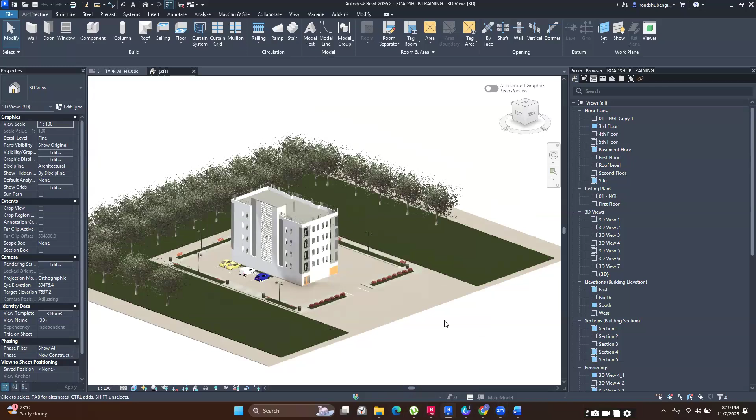By doing the analysis and design, we are looking at, one, the structure you're going to be using, and two, we need to understand the actions of the loads acting on our structure. From those actions, we want to understand the effects on the various elements - the internal forces that develop in the members, that is the columns and beams, the shear forces that arise from the loading, the bending moments, and how we transfer that load to the soil. So basically, that's what we are going to be doing.

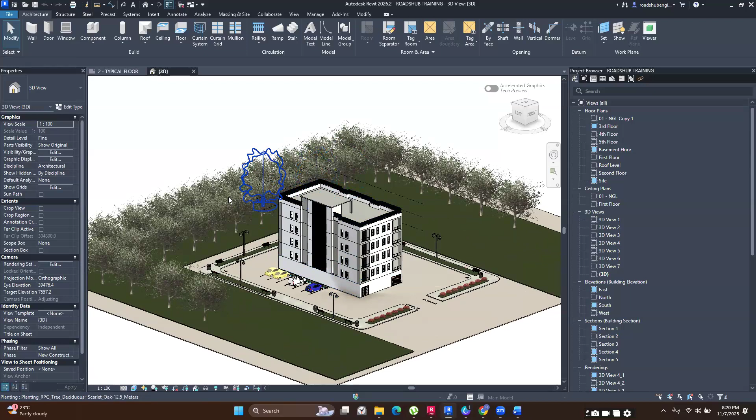Once we understand those actions and effects, we can go to the reinforcing bit, where we ensure our structure is safe to stand. For reference, we are going to be using a few books, mostly, and we are also going to be referring to the Eurocodes for our design.

So what you're looking at right now is the architectural model that you're going to be using. This is what you're going to be designing. The purpose of having this is to put you in a real life scenario that you would find yourself in.

My assumption here is that we are all engineers, and we know our role when it comes to construction. For a structure to stand, it takes a lot of teamwork - one from the client and architect meeting, so they can visualize the idea and come up with a concept they want to build. Once the architect and client have met and pictured something, that's where you, as the structural engineer, come in. At this point, they do not know what sizes of columns they need, or where the beams would be placed.

They do not know the required sizes of the slabs and reinforcements, or the types of foundation they would use. So that is your role to find out the sizes of the columns, the orientation, where the beams would be.

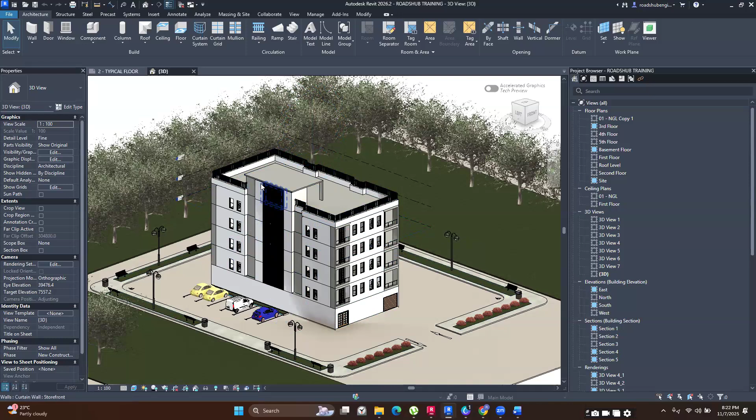And also the foundations, to ensure the structure is safe. So for you to do that, you need to do an analysis and then the design. But before the analysis, you need to understand what they want to achieve, and have a good grasp of the loads you're going to apply to your structure, because it plays a big part in the results you get.

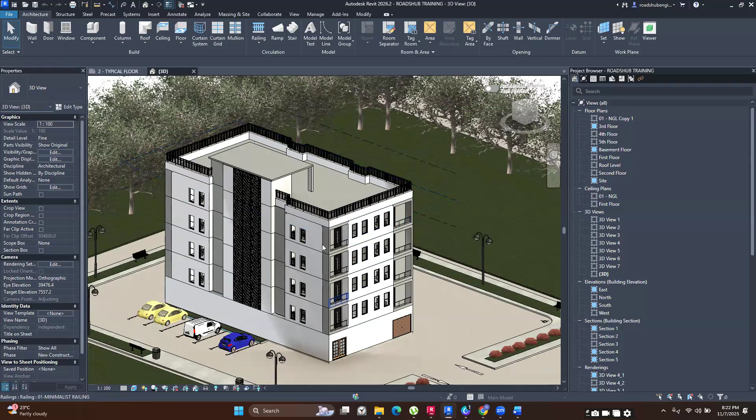This structure is what you're working with because it will give you good exposure to most of the RC elements you'll be required to design. So this is how it looks. It's a five-story structure, with 5 floors and a basement floor.

Let me open up a section view. So you can see it has a section, with a basement floor over here, which is below the ground. This floor is going to be used as a parking lot. We're going to need to design the foundations or basement walls to ensure they do not collapse due to the weight of the soil, the soil pressures, and the water acting on the site.

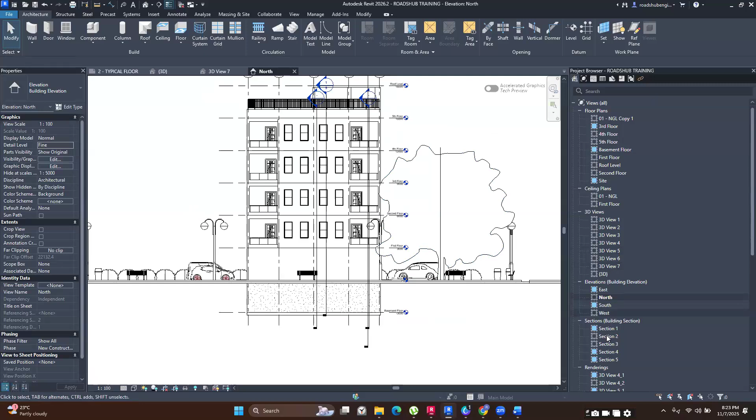And because we have a basement floor, it makes sense that we would have a ramp. So these are the RC elements we're going to be designing when we work with this structure: normal solid slabs supported by beams, hollow pot slabs, beams, columns, shear walls, the foundations, and the ramp itself.

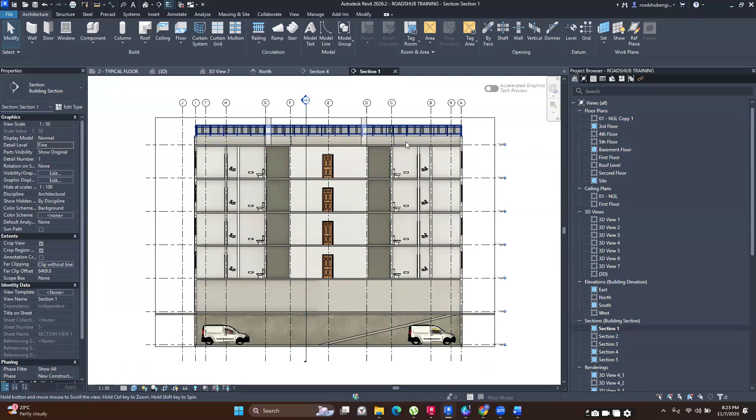It's our belief that if we take you through the design of this structure in the next 5 weeks, we'll put you in a very good position when it comes to structural design. It would be hard for you to get out of the course and find an RC element that we did not take you through.

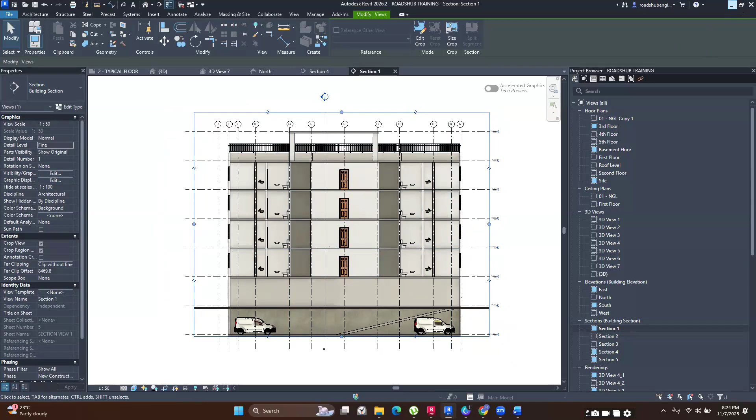So this is the architectural model, this is what you're going to be designing, shown here in the Revit software. This is the software we'll be working in. What you're seeing here is the architectural bits - walls, floors, a few cars and the site. This is what should interest you.

Before I go into talking about the model itself, I'd like to shed some light on this software. From the calls I had with some of you, I realized most of you had not been exposed to Robot - some didn't even know it exists. So it would be fair if I shed some light on this software.

Autodesk Robot is a software by Autodesk, and it's very powerful. The reason I say it's powerful is because it's not limited to RC structures only. It can be used to design structural buildings like the one we have here, your bridges because it allows modeling moving loads, your culverts, your retaining structures, and also your steel structures.

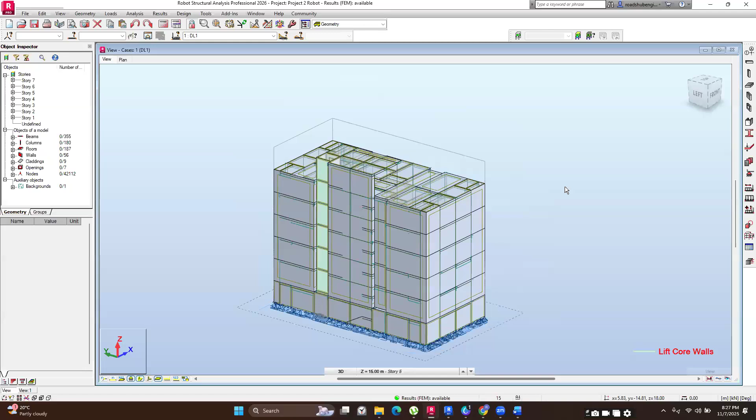The other thing I personally love about Robot is it gives you reasonable, economical designs. You're not going to find a design with a lot of discrepancies compared to manual design. When you design a slab or beam manually, the results would be quite similar to what you get from the software. That's the thing I love most about this software, and that's the reason I recommend it.

Just to go back to the model, these are the elements you're going to be designing. You can see we have our shear walls, and then these items here are just claddings.

The reason we have these claddings is because we are going to be doing our wind analysis and loading. We'll assume this structure is located somewhere in Kiambu with a given wind speed and terrain conditions, and you're going to design for that. To design for wind loads, you need to model your structure so that it replicates how it would behave in real life.

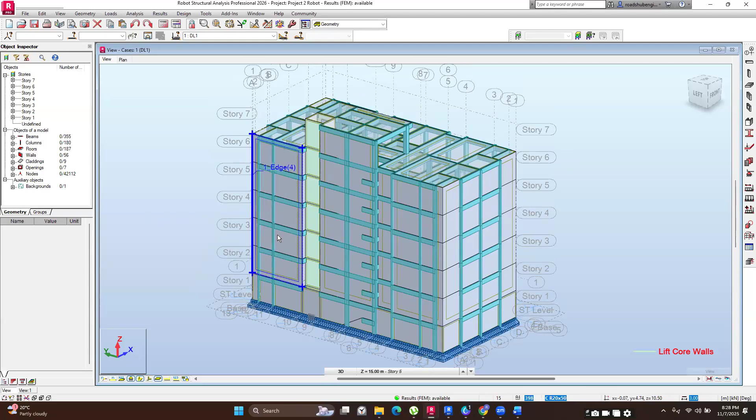If you have this cladding, it means your horizontal loads would be transmitted to the beams, to the columns and the walls, and then to the ground, just as it would be in real life, where wind loads are incident on the walls and transmitted to the columns and shear walls, and then to the ground itself.

Apart from that, you're also going to be designing for our gravity loads, which will include the live loads and the dead loads.

You're going to be assuming the top area is a storage unit where we have a few water tanks, so we can calculate those loads manually and decompose them to the slab.

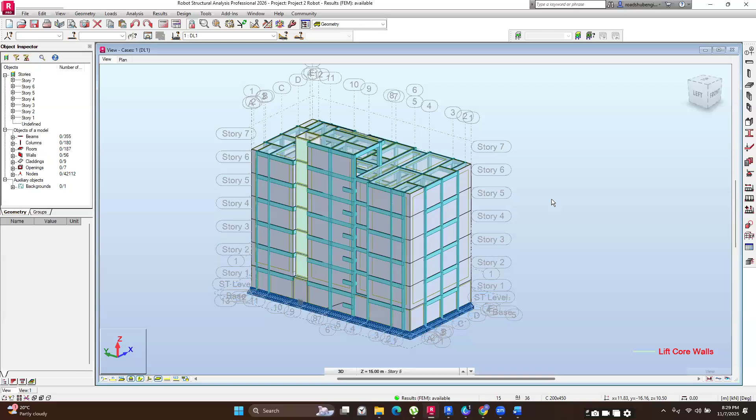Then do our design. For the other floors, we are going to be reading the Eurocode and following the loads they recommend as the floor dead loads and live loads.

When it comes to the parking area, you're also going to refer to the Eurocode so we can discuss what class our parking falls under, so that we can assign it the correct live load for our cars.

For the basement walls, we're also going to load them with the soil pressures arising from the soils incident on the walls, and then design for them.

The last thing we need to do is model the foundations. We are going to do quite a few of them. We'll ensure we model pad foundations - those are single footings for each column.

Then we are going to do our combined foundations. In scenarios where you try to design pad foundations for columns that are quite close to each other, the footings end up overlapping due to space issues. So you find yourself having to use combined foundations.

The other footing we have to do is the strip foundation. This is a very common type of foundation, majorly used to transfer wall loads to the soil. So it's only fair we do the strip foundations as well.

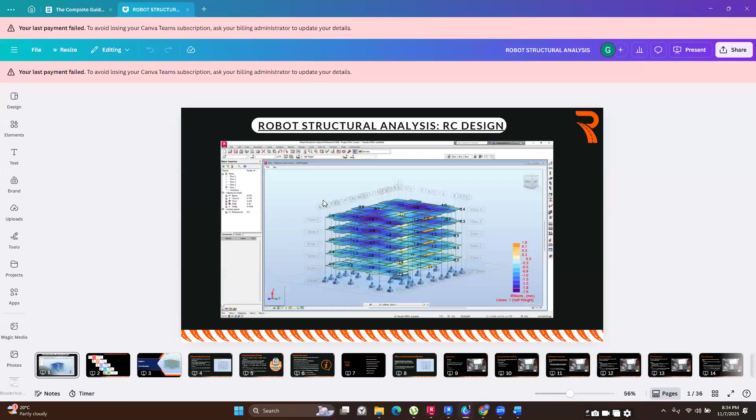The first week is usually all about installing the software. So next week will be all about installing the software, and we are also going to start on the theoretical bit of structural design. Before we jump into the software, I know for most of us, someone mentioned they haven't been on the structures side for quite a bit and would like a refresher. So even before we get to the software, it's only fair that we go through our theory first, just to refine a bit and understand some of the things we should be looking at and looking for. Once we understand the theoretical background of the design, we can jump into the software.

Remember, the software is just a tool, and you are the engineer, so you're responsible for making the decisions. Without sufficient information regarding structural design as a concept, the software would not be of much use to you. The whole purpose of this training is to put you in a position where you can make knowledgeable decisions on your own. It's not for you to be reliant on anyone, not to rely on the software or on the videos. It's for you to be able to think through certain scenarios.

Design usually changes from project to project. Some of the challenges you're going to face with this particular project are not going to be the same as those in the second or third project. So the goal is to train you on how you approach certain scenarios, and from those scenarios you can think through and decide the best way forward. That's what you're going to be doing. So we are going to go through the theoretical bit, and after we're done with that, we can go into the software itself and do our design.

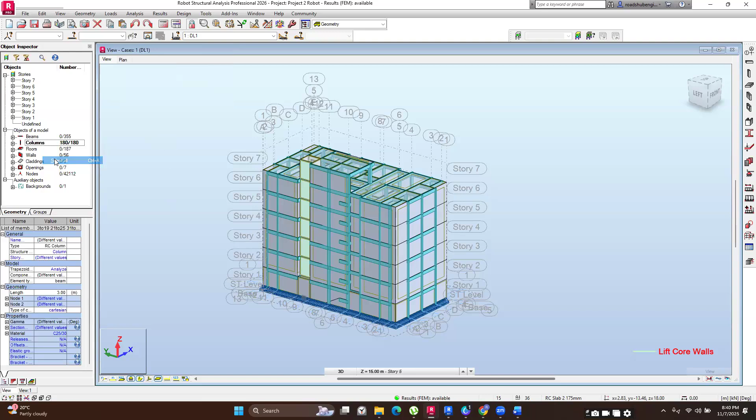I'll just demonstrate how the software shows you the axial loads. You don't have to worry about this—we are going to go into it deeper into the course. This is just to show you how it would look.

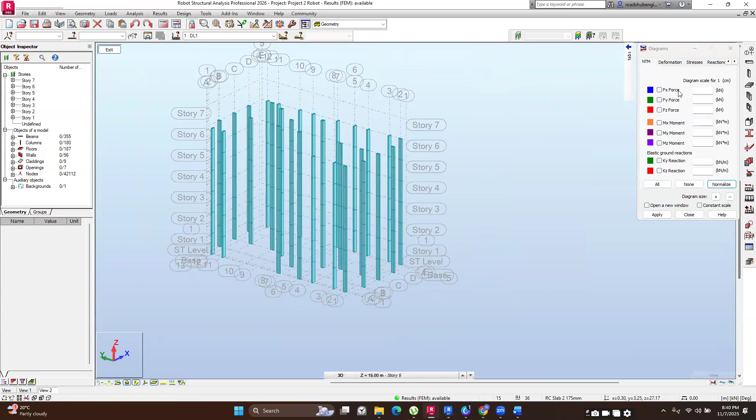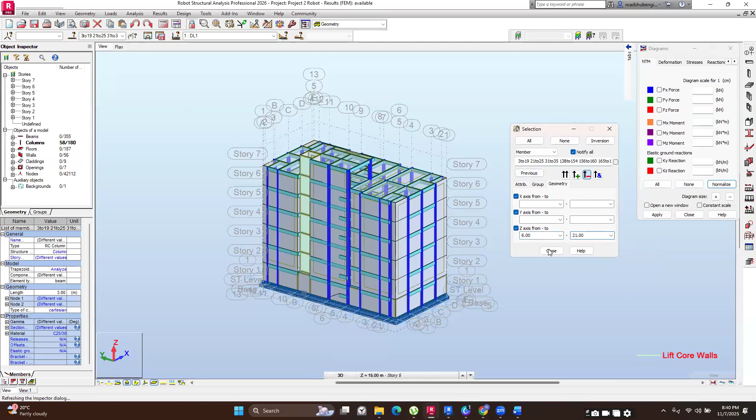So I've filtered out my columns so I can specifically look at them. You can even go a step further if you're interested in specific columns—say if I'm interested in the ground floor columns only, I can select those columns only. So if this is your interest, to just have the lower columns only, you can do this.

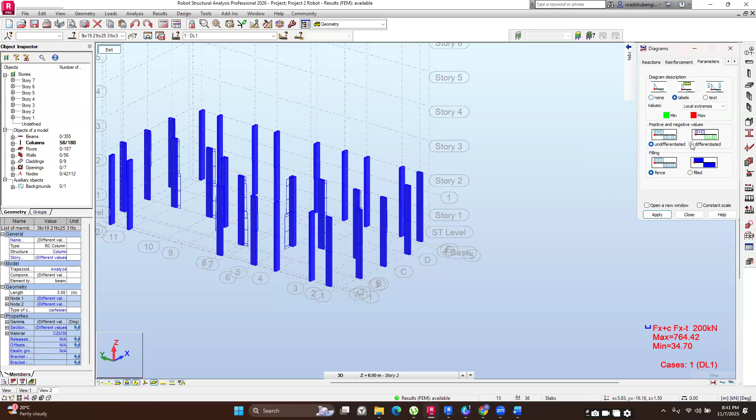And then you can look at their forces. If you're interested in the axial loads, because they increase going downwards, you expect your maximum axial loads to be at the bottom, at the lower columns. So you can separate or filter them out and view their results. This is just one of the ways you can view your results, get to understand which is your most loaded column, and use it for design, either for columns or for foundations.

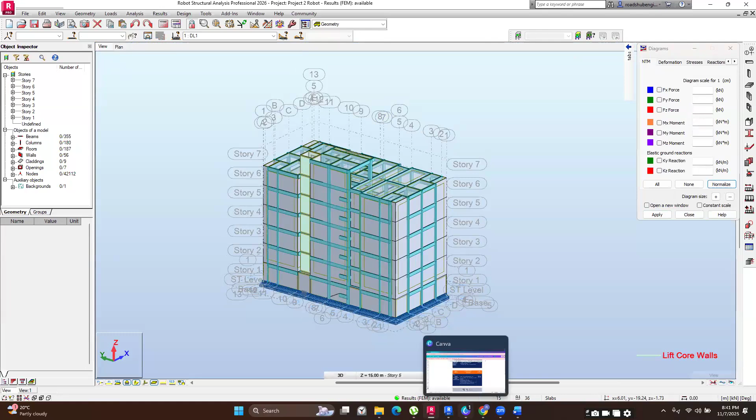So that was just to show you how the software does that. And then now I can go back to the course outline. So after we have read the results and understood them, now we are going to go into the design of the various elements.

So you're going to start with slabs because they're a bit easier to do. Then you're going to go to beams, then columns, then the shear walls, and then finally the foundations.

And then after that, we are going to have a session purely on generating reports, so as to ensure that you are ready to submit your design for approval.

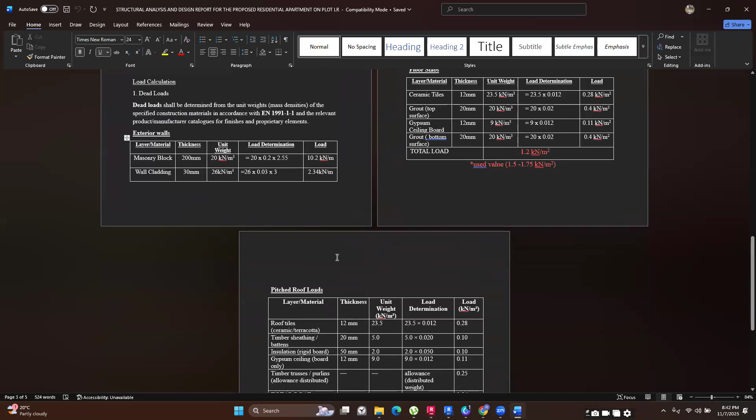The beauty of this is that you're not going to be working alone. Even when it comes to generating the report, we are going to be sharing our templates and all the resources with you so that learning can be quite easy. We just want you to focus on the learning bit, and for the resources, everything you would consider a resource, I don't want you to stress about it.

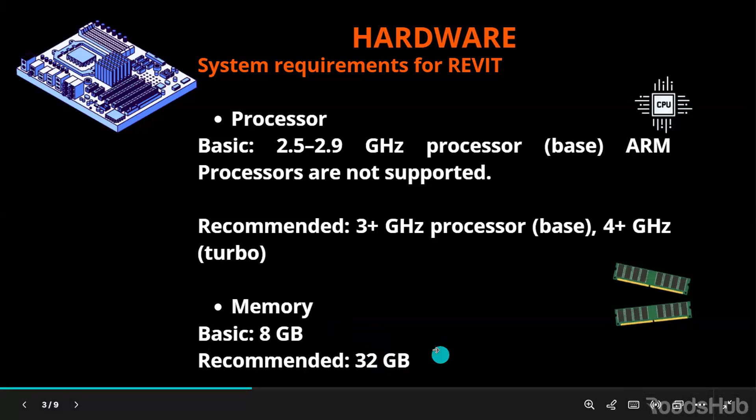Now, when it comes to memory, this is the RAM. 8 gigabytes is the basic. Remember, I said when you're running calculations is when Robot is most engaged, and if you have sufficient RAM, it will clearly assist you do the calculations smoothly compared to a limited set of RAM. So make sure the minimum you have is 8, but if you're looking to purchase a PC in future, don't get anything less than 32 gigabytes. 64 is fine too. And coming to the display, I'm not so worried about that.

Whatever you have should be sufficient, but conventionally 1920 by 1080 should be good enough for you. If you have a 4K display, that will make everything wonderful, but you don't really need a 4K display. What you need is 1920 by 1080. That should be good enough for you.

For graphic cards, yes, it normally helps when we're doing concurrent computations. Let's say when you're running analysis, just checking and verifying the members if they are correctly defined, the load transfer is correct. Some of those concurrent calculations can be handled by the GPU, but at this stage you really don't need it. So if you don't have it, don't stress about it. Just make sure your processor is good. If your processor is good, you should be good.

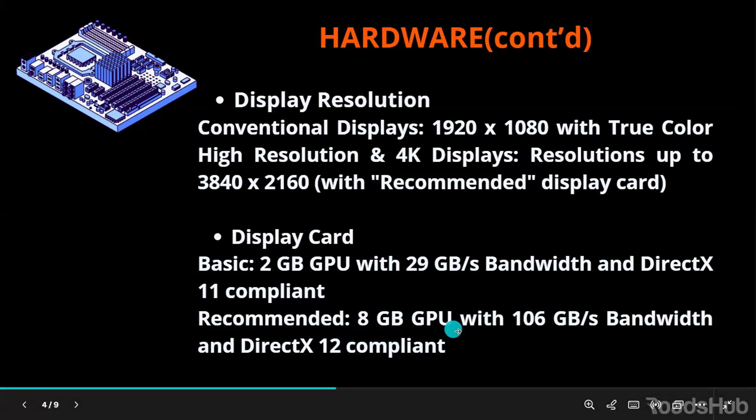But if you have it, and I'm saying if in future you're looking into getting a good PC dedicated for this kind of work, I'll recommend you get an 8 GB GPU to accompany the other components.

When it comes to storage, Robot is not as huge compared to Revit. Revit usually takes around 17 gigs of storage when you install it. But when it comes to Robot, it will only take 1.5 to 1.6 gigs. If you add some plugins, it might get to 2 gigabytes. That's not much. But here is the caveat.

When it comes to the network, don't worry about it. The network license manager will be installed automatically when you install your program.

Most importantly, on the hardware side, this is something you shouldn't ignore: a pointing device. Make sure you have a mouse for design. Especially for those having laptops, using the touchpad is usually so stressful. It will make the process more complicated and more difficult than it seems. So just make sure you have a pointing device, wireless or not, just make sure you have one. If you have a stylus and can figure your way around it, well and good, that's the future, but the minimum you should have is at least a mouse.